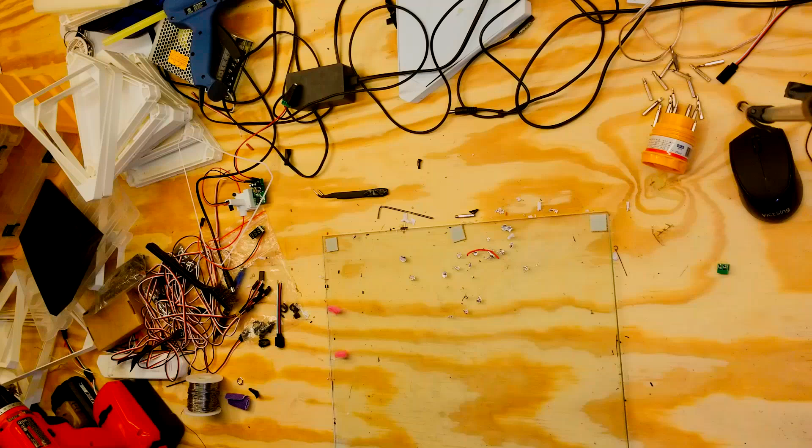All right, so today we are coming up with a way to mount this.

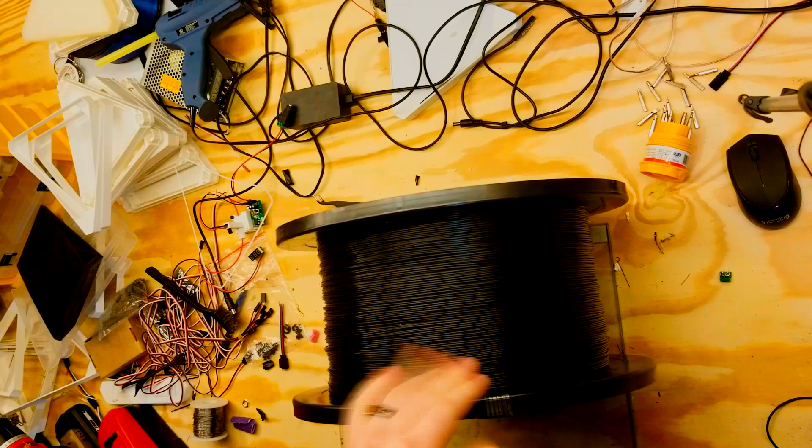This is 15 pounds, not kilograms, so there's a trap, 15 pounds of 1.75 millimeter PLA black. This is enough filament to keep you busy for quite some time. I print enough stuff that I'm looking to get something a little bit bigger, and now I do.

So I got this on Black Friday and I haven't mounted it yet. For reference, this is what a normal spool looks like. So you've got the width there, about twice the width, but where it really matters is the girth, and it's quite the show.

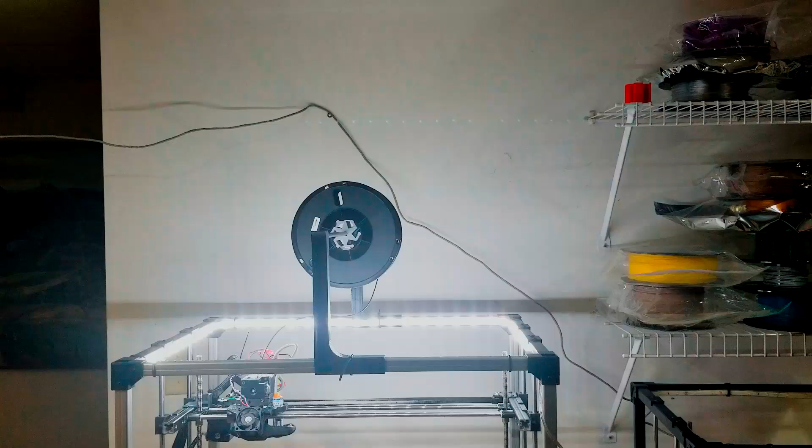It appears my camera rattled out of position here, but I think it'll be a pretty nice upgrade. The current system we have now is just a simple 9mm rod at the top that the filament spools along. To help aid it, I have these printed core pieces that, instead of a herky-jerky motion as it unravels and cams over based on where the filament is looped, there are spool inserts that help it rotate, since this is a fairly small shaft.

One of the big challenges of having such a large spool is that the center core gets so much bigger, and it's kind of hard to do right over the center of a bot like this, or even on my other bot over there. So I came up with a pretty good solution.

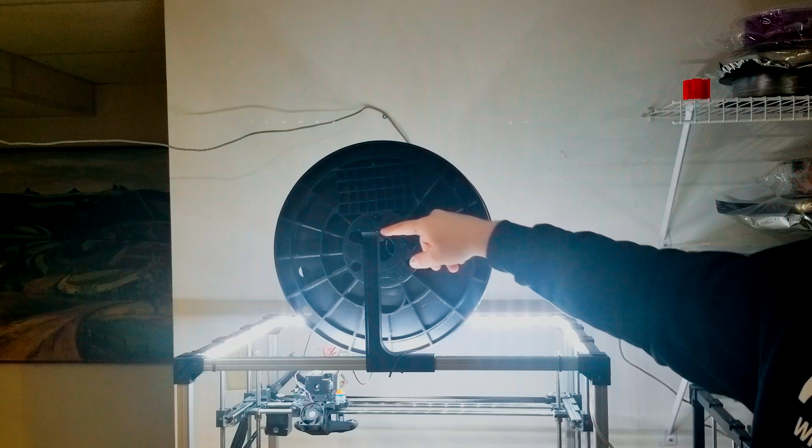As you can see, our 15-pound spool is pretty large and heavy, so it's even a challenge just to get the thing on there, and I even have it in the wrong hole. As you can see, it sits on that top surface and only has a very small area for the entirety of the spool to rest on, which makes for a herky-jerky motion as it rolls along, meaning the motion of the head going back and forth isn't going to be very useful at all.

As is the case in the laboratory so many times, something broke. And today, it's the poor tripod. That poor leg, unfortunate. We'll get it wrapped up with some electrical tape for a temporary stint, and it'll never fully fold all the way down, but that's okay in the end. I would say it's good as new, but we all would know that that would be a lie, but it is better than where it started.

If at first you don't succeed, try again until something stupid works, or you wind up throwing it away and buying a new one. So what we've got here is we enhanced the structural rigidity of this by throwing in some of those useless extra hex wrenches we seem to get with everything and yet don't need a lot of. But the one we actually do need is the only one we don't have. So this should hold up a little better, quite a bit stronger.

I modeled the part up in Fusion 360, which is quickly becoming one of my favorite software packages. Through the power of editing, you get to see me clumsily making this wonderful contraption, mostly by just chucking some stuff together. But I wound up doing some FEA on it, and the values I used were based off of something I found online that suggested using 1/3 of the material strength for the material you're printing in. So that's what I wound up doing, but it still passed.

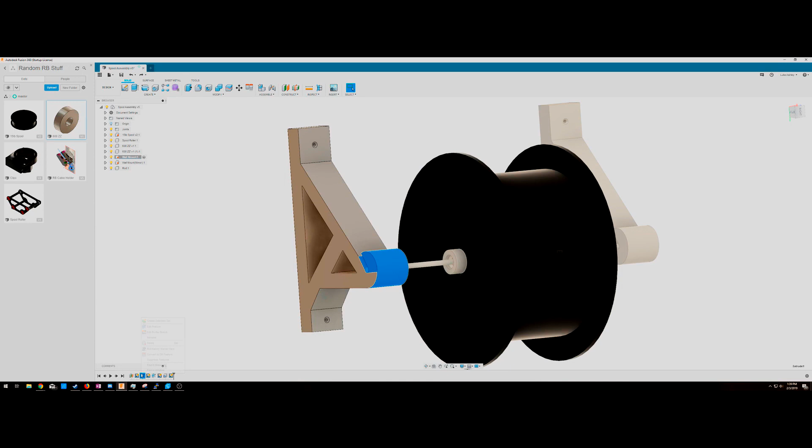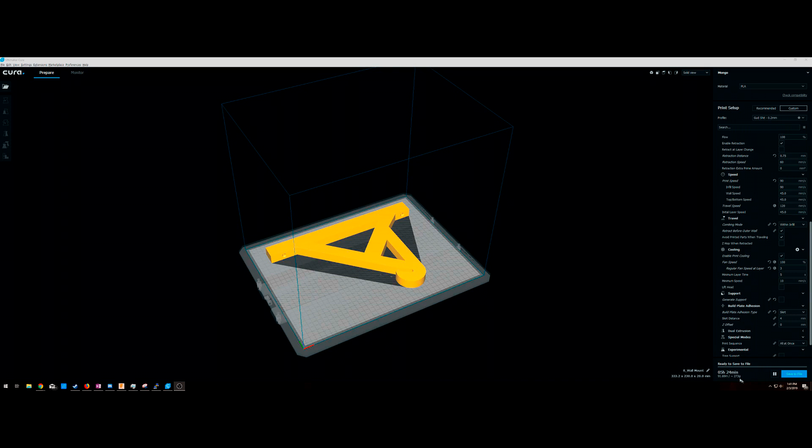So we head back into FEA, take a look at it, and make it a bit skinnier here, bringing that back down to a more reasonable value. So we're back down to 20 mil for a width. Chuck that back into the simulation, and away we go. Now that it's back in the slicer, it's down to 5 hours, and we're down to 1/4 of a kilogram instead of 3/4 of a kilogram.

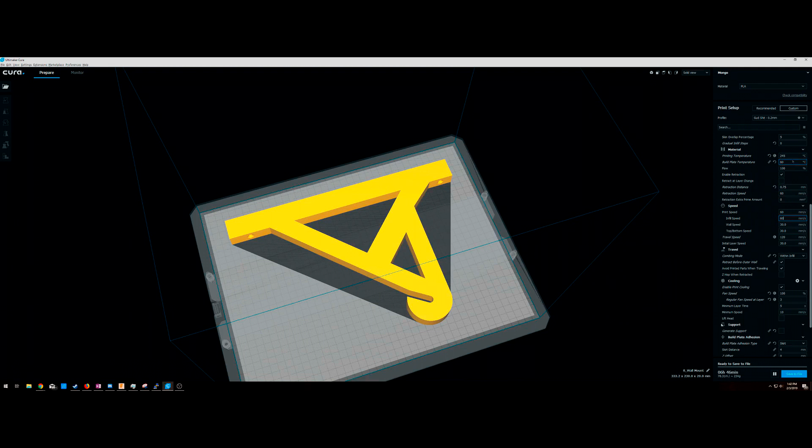Just taking a look through all of our settings here, it looks like this was set to PLA temp, so we're going to bump that to 245 and lower the print speed to 60. This Amazon Basics PETG I've been using appears to be a little stingier how fast it's flowing, and I want it to work well, especially because I don't want to waste all this PETG. And we bump up the bed temperature to 85 degrees. I also do have glue stick on the base of the printer just to make sure it doesn't stick too well to that wonderful PEI bed surface. So let's get it on the bed.

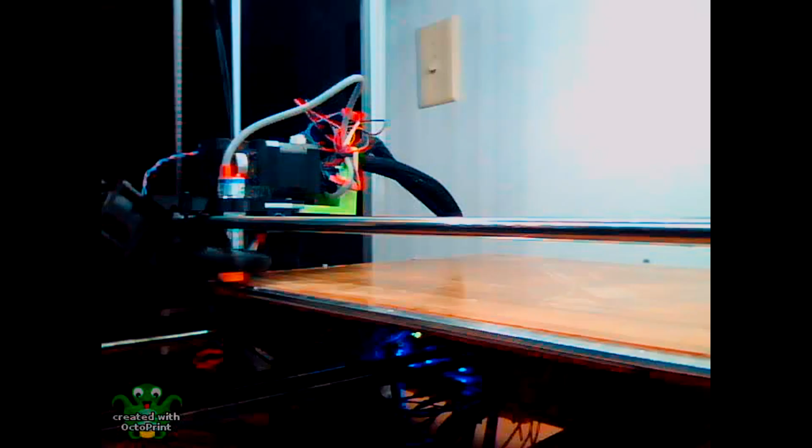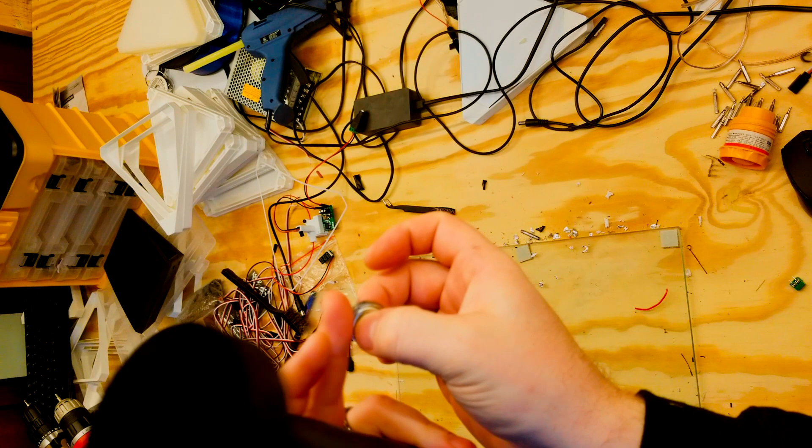So now we have our centerpiece here, and we just have to put in the 608 bearings, which are straight out of a fidget spinner that nobody wanted. So I already have this one pressed in. I did that just to see if it would work because I pretty much guessed at the other ones, and now we just need to put in this one.

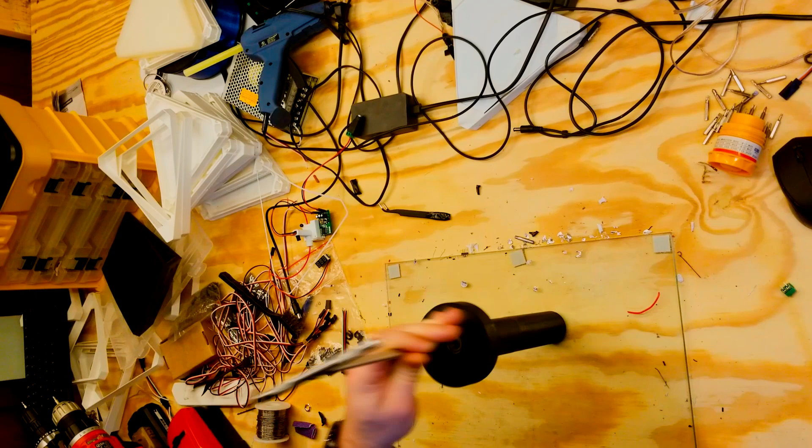So in the words of one of my favorite YouTubers, tappy tap tap. And there we go, pressed in as a nice bearing surface.

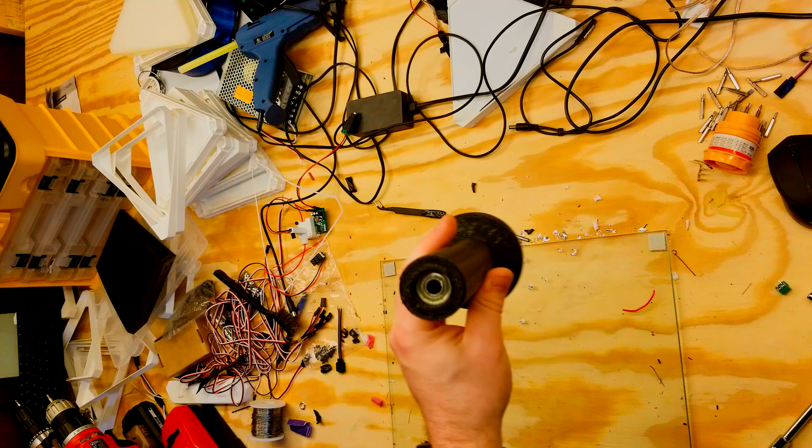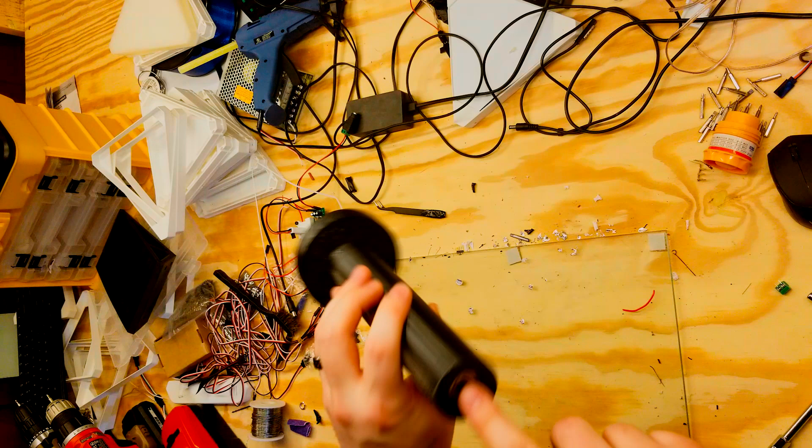So like I said before, what this will do is take all the friction off of rubbing on the rod that's going to go through and be mounted on the wall, and instead it'll just go on two nice bearing races. Because the hole on the inside is slightly oversized for the rod, and the bearing is just right for the rod, it shouldn't touch any of the inside of this piece at all, and just glide nicely on those surfaces.

All right, it is time to insert it. So what I'm gonna do is kind of screw it in, going around the back here, and then as it goes to the front, it's quite a lot of fun. Come on.

And there we go. So the bearing here should glide pretty smoothly.

Now it's time to mount it on the wall. And now we're gonna find out where the studs are, so then we can use that to plan out where we're gonna put it.

With another astonishing use of the eyeball laser, I've at least installed them with the tops correct. So I'm gonna get the sides actually straightened out for real this time, and then see if that rod still runs through, and then we will fasten the lower two screws and see if it holds. Wish me luck.

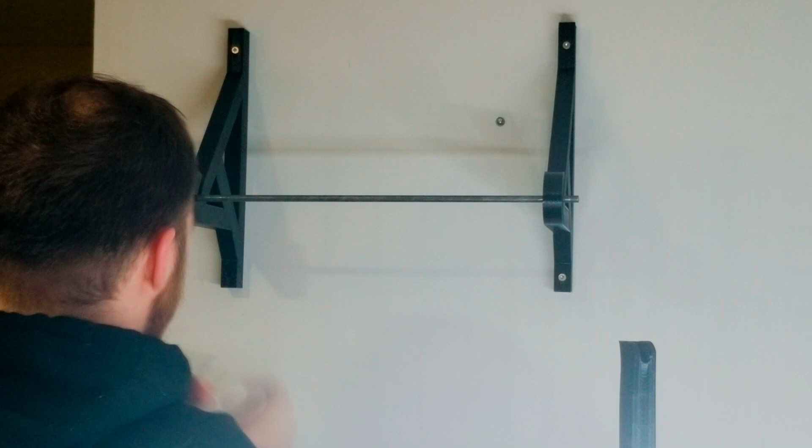All right, so we're gonna get the spool mounted up. So I have the rod threaded through the two bearings in the middle, and we'll set her in, and it worked. It looks like it spins pretty darn well on those bearings. So we'll give her a couple spins and see if it's working correctly.

Now the thing that I noticed while spinning it though is that it can move from side to side inside of those races there, which I'll solve in a little bit by adding in some electrical tape.

So I'm just going to add some holes on the top there so I can run some zip ties through and fasten the Ethernet cable. And then I'm going to give it a spin here and make sure that it rolls correctly and that it's not going to go side to side.

So on the sides there I've added in electrical tape, which I will solve later by adding in some end caps to prevent it from falling off.

All right, so now that it's all set up on the wall, it's time for the real test. Here we go.

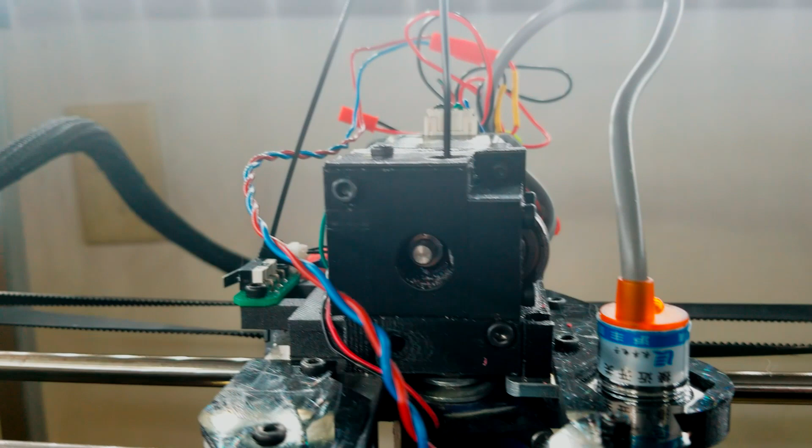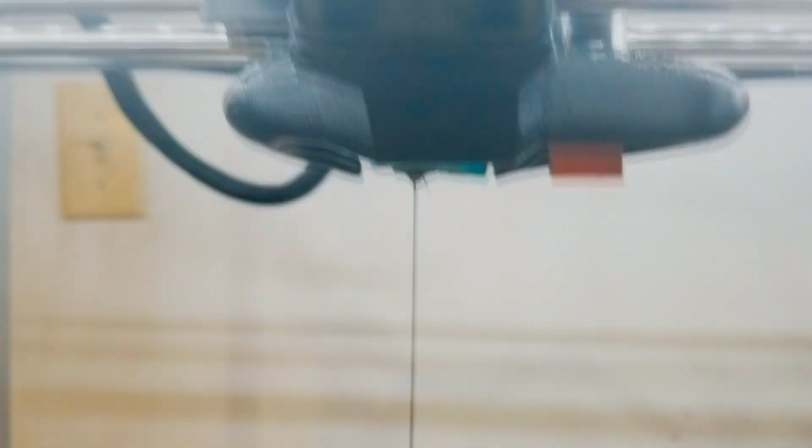It's moving. It's moving. The wheel is turning. The fitting is falling here. And there is, in fact, plastic coming out of the bottom in the form of a nice noose.

Isn't that wonderful? So we are going to crank up a little more and see if we can get that to turn.

I think it's actually turning. I am as surprised as you are. So turned her up quite a bit here to 240 millimeters, so we'll see if she continues to turn.

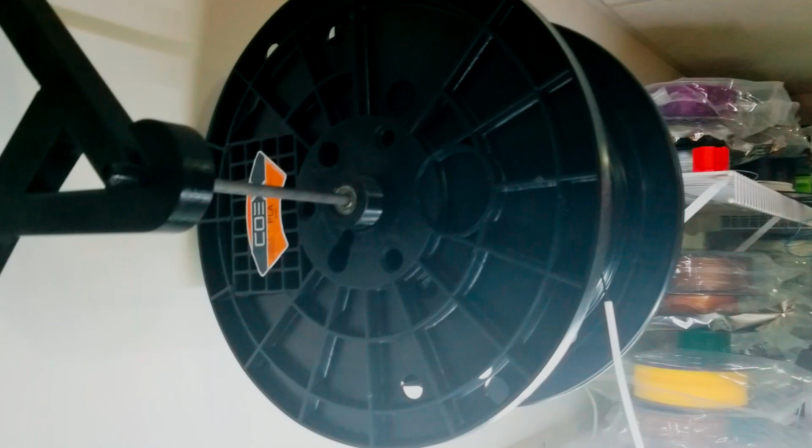Oh, look at that. I think we have ourselves a winner.

I mean, obviously the real test will be to use it actually in motion there with this head moving back and forth. But it'll also be really nice, I realized, not to have the suspended mass of all the materials above hand. So when this thing rattles, there's this giant counterweight that is weeble-wobbling back and forth, and it's not the good kind of counterweight, which is at the bottom in the center of mass, but it moves the center of mass way up, which, now that it's a disconnected system, only connected via a tiny little filament tube, should be a lot easier on the mechanics of this bad boy.

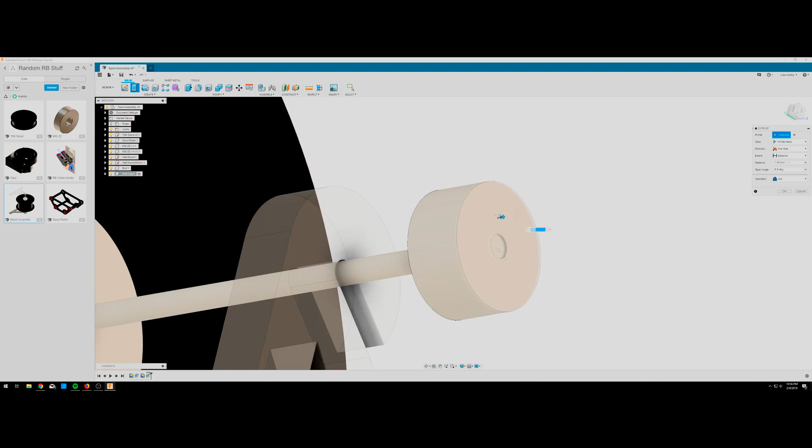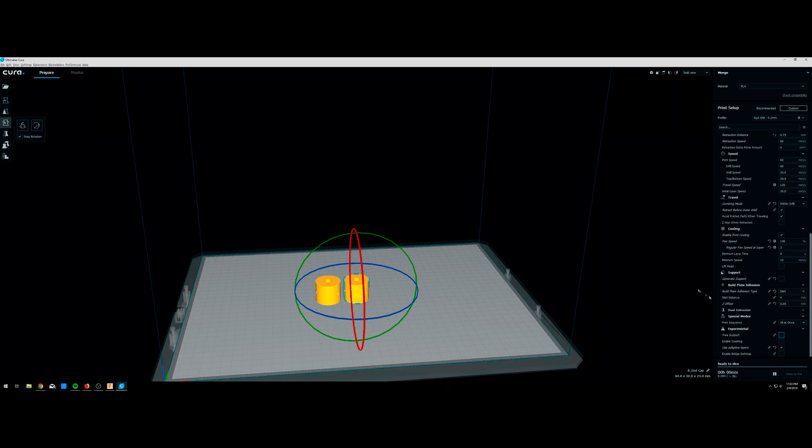So I did wind up making simple end caps, as we talked about before. So all they are is just some printed end stops, and then I will put in an additional set screw ports, so we can use that to make sure that the caps stay on and prevent the rod from moving side to side. And here are some basic print settings on what I did. Pretty simple print, pretty simple process, and should be pretty easy.

Well, there you have it. One wall-mounted 15-pound spool holder at the top there. The best part is, I think, that it rolls smoothly on those ball bearings, but it's also able to have that large roll taken off and the regular rolls put on. So we're not making it any more difficult to use the system.